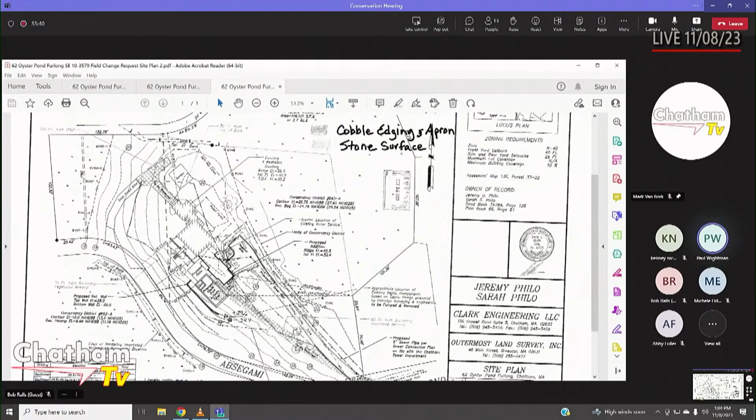Thank you, Madam Chair. First on the agenda is a field change request. The address is 62 Oyster Pond Furlong, Sarah Philo, map 13E, parcel 33-22, DEP number SE103579, addition of granite cobble apron where the driveway meets the road. That's the description, but is there also a request for laying cobblestones along the length of the driveway as part of that? Yes. That's part of it. And also part of it will be removal of the small area of asphalt that shows up on the plan. What shows on the plan as existing paved drive is being removed. Correct. Okay. Well, does anybody have any questions? There are folks here in the audience representing the project if anyone has questions about the field change request.

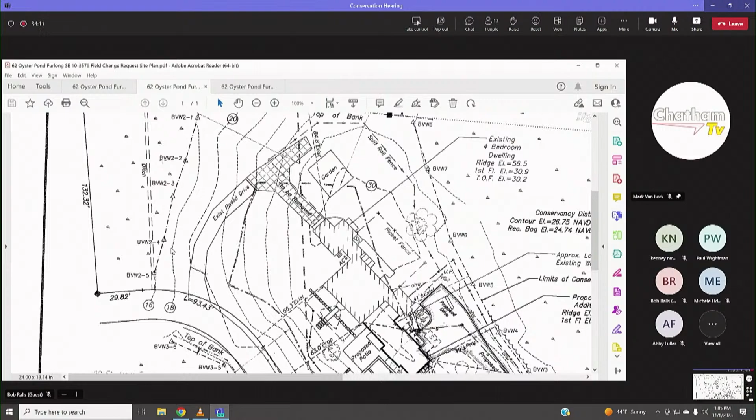Paul, do you have a recommendation about this one? I met with the proponents, and based on my review and our discussions and an examination of the plan and the materials they're going to use, the cobblestones and the removal of the driveway, I'd recommend approving this field change request. Okay, thank you. You're welcome.

I think, at least my sense is, and maybe people can chime in if they don't agree, that what we're going to lose a little bit of in permeability of the cobblestones themselves is more than offset by the removal of the asphalt driveway. So it's a net benefit, I would say. Agreed. Anybody? Any other? All right, then we're ready for a motion for this.

I move that we approve the field change request for 62 Oyster Pond Furlong. Gordon, second. Roll call vote. Bob? Aye. Elise? Aye. Karen? Aye. Mary? Aye. Cheryl? Aye. And I vote aye too, that's unanimous. Okay.

All right, Paul, moving on to the next one. Next one on the agenda, Madam Chair. Yeah, that was quick, see, in and out, you didn't even have to do anything. Yeah. Sorry, Paul.

No, it's all right. Just bear with me because, as I said, for some reason we lost the internet just before the meeting happened, so I'm working off my mobile phone here. I saw that happen, it did happen on this end, I think, so, yeah. Okay. It's back. If there's a break, I'll try to reconnect. Okay, and if not, just give us a sign and we'll read them. Okay. Well, the phone's working anyway.

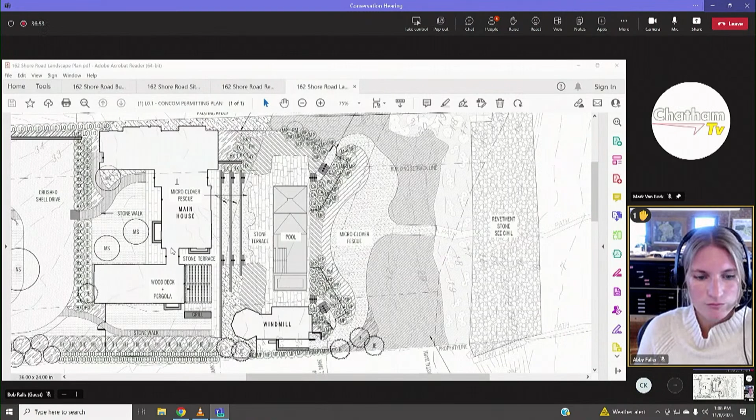Okay. Good afternoon. There is an SE number. It's SE 10-3650. Thank you, Crystal. Okay, yes. Thank you, Madam Chairman. Bill Litchfield here on behalf of Tom and Michelle Jennings, and with me is Stephanie Sequin, as you know. Also our architect, Tom McNeil, Matt Lautenberger of Wilkinson Ecological Design, and Joe Waller of Stimson.

And we appreciate Crystal's having indicated that we have the file number, and just to bring you up to date, you will recall that we had an initial hearing with you on October 11th, and then you were gracious enough to come out for a site visit on October 24th. As a result of the initial hearing and the site visit, we understood that while we thought we had a good plan, there were some things that we could do which would be responsive to some of your suggestions.

You had a concern about the retaining wall of the NDZ. You were unenthused about some of the hardscape in the NDZ. There was an issue of the percentage being above the 35% requirement. There was a fence along the north perimeter and some other fencing, which had the potential to have impact on wildlife. There was a concern that some of the non-native species might not be appropriate, some of the cultivars be replaced within your jurisdiction. Even though we had proposed a lot of mitigation, there were questions about that mitigation.

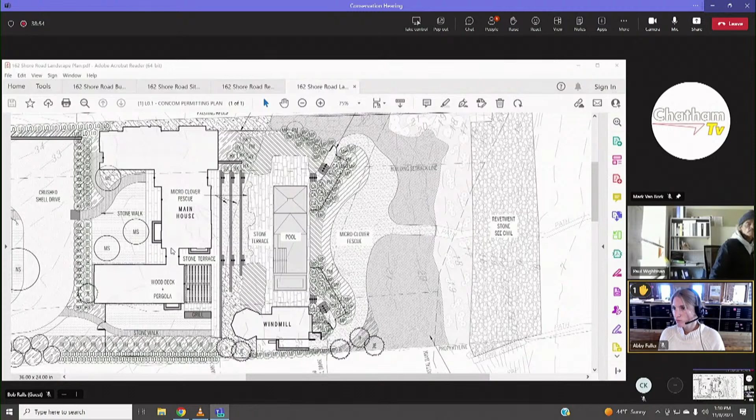There was some amount of lawn in the aura, and you questioned that, and we understood it. And when we went out there, you saw an area of pretty unfortunate invasives along the north property line. They weren't strictly on our property, but we wanted to address that as well. Tom and Michelle Jennings, the applicants, as I think some of you will recall, own the property immediately to the south, and they have been good stewards of that property, and they propose to be very good stewards of 162.

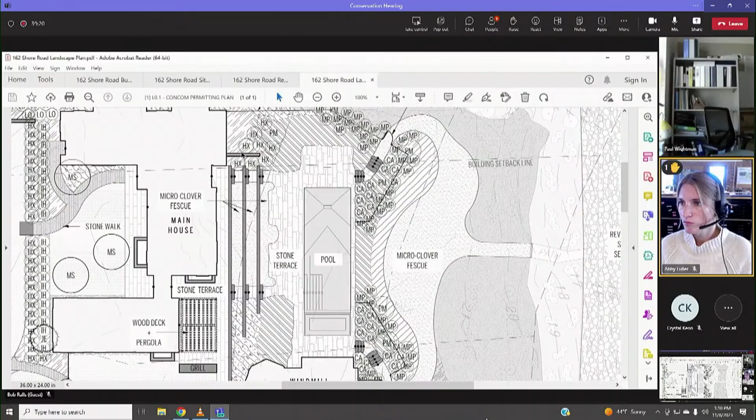The plan, I think those of you who know the history of the property went out there, you know, it had a turf lawn down to the top of the revetment. That lawn is not exactly what a landscaper would like to see right now, but it was a maintained lawn, and that's going to go away. In fact, the lawn area is being reduced in the 100-foot jurisdiction from 6,900 to 2,300 square feet, and the native vegetation is increasing by a factor of 5 from 600 square feet to 3,000.

But we understand that you wanted some additional changes, so we shifted the structures. The house, the windmill, and the rear landscaping elements have all been shifted further to the west, away from your jurisdiction. The retaining wall and the hardscape have been completely removed from the NDZ. There's none of that remaining in the 50-foot zone. We reduced the overall extent of the hardscape in the proposed plan to accomplish a 35% coverage limitation.

We are looking for some degree of grace, also known as a variance, in regard to moving the windmill completely out of the NDZ. If we left it where it is right now, our percentage in the outer aura would be lower, but we think there's a beneficial aspect for you, for the town as a whole, and certainly for the interests which you serve, as well as Tom and Michelle Jennings, by moving the windmill out of the NDZ and into the aura. We have augmented the fence gate, the fencing to provide that there will be at least a 6-inch gap below to allow for wildlife to move within that area to enable wildlife passage.

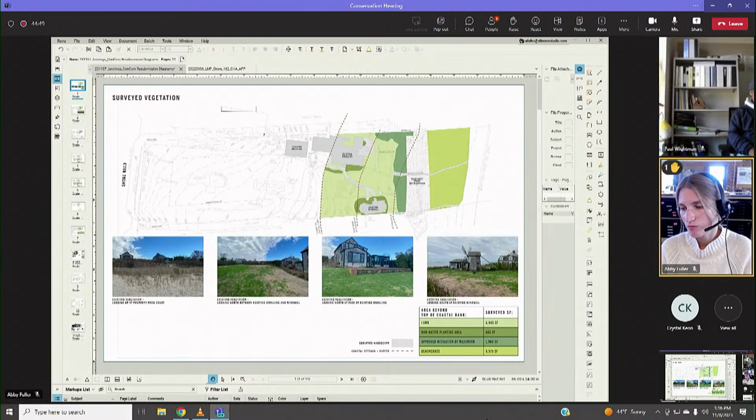If you take that number and deduct the 609 square feet associated with the windmill and the hardscaping surrounding that, that brings the coverage down to 1,995 square feet, or just about 33% of the outer aura. So we are requesting that variance to allow the coverage in excess of 35% in order to allow the relocation of the windmill out of the NDZ and into the outer aura. So that's all I really have to add. If you don't have any specific questions, I can turn it over to Joe Waller from Stimson.

Okay, before you do, I'll just note that the email that contained all of the analysis that you just gave us was sent to Paul, and then from him to Karen and I, so I have now just forwarded it to everybody else. I was about to ask you to read your email, but you have already given us the information in terms of the variance analysis and what your numbers were. So we now have that. So thank you. All right, okay.

Great. I'm Joe Waller from Stimson Landscape Architects. I have Abby Fuller virtually joining. She's sharing some diagrams which will hopefully visually document all of this information that Bill and Stephanie have just shared. Abby, could you go to presentation mode so that we see a fuller screen?

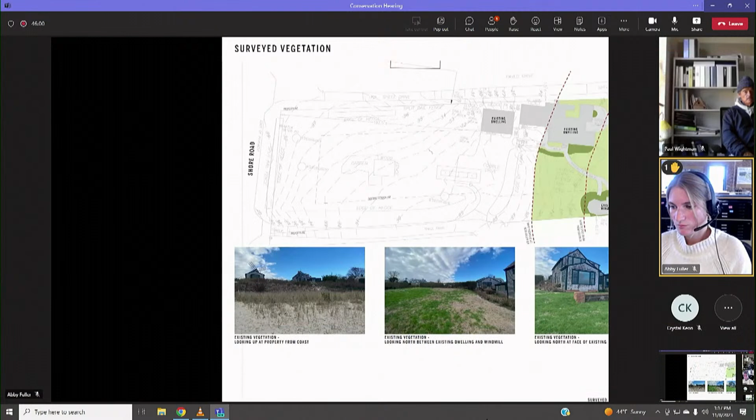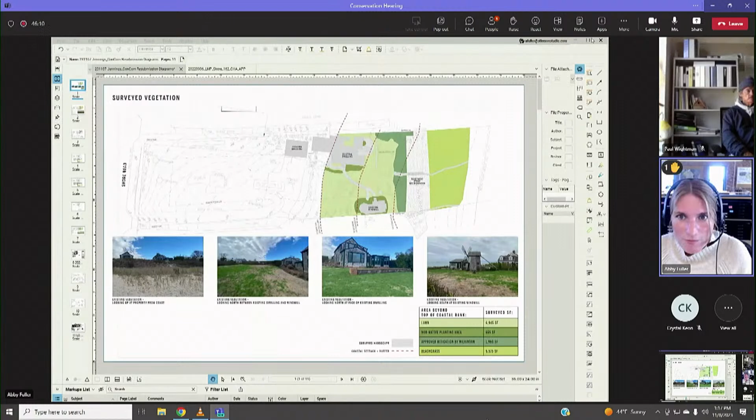Thank you. Could you just adjust, it looks like it's justified off a little bit, so you need to pull it to the left, I'm not sure. If it's not possible, we can stay on this screen. Sorry, I apologize. I think my screen is too large to do that. One moment. Oops. Is that better? Yeah, if you just go back to the first page.

Of the presentation. Great. So we all met on site. This is just a diagram of the existing conditions as surveyed and as observed during our site visit. Documentation of the metrics in the bottom right-hand corner. The site is within your jurisdiction, currently largely lawn and non-native planting. Nearly 7,000 square feet of lawn exist in the 0 to 100. Some photographs there to document it.

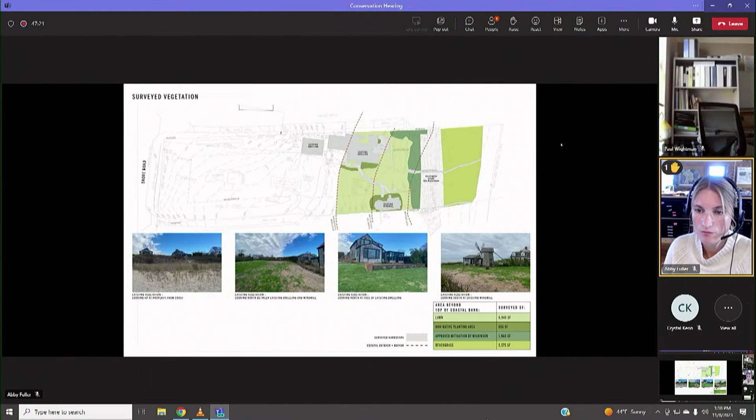There is mitigation planting, which will be happening, that has been approved as associated with the revetment work, which has been completed. And then there's existing beach grass within the resource area. We can go to the next slide. This was the plan that we previously proposed. Just wanted to quickly touch on, in this plan, we had a significant reduction in lawn and a significant increase in native vegetation. The reduction in lawn was over 4,600 square feet, and the increase in native vegetation was over 2,180 square feet. There was also additional proposed mitigation planting beyond that associated with the revetment wall that totaled 830 square feet. We can go to the next page.

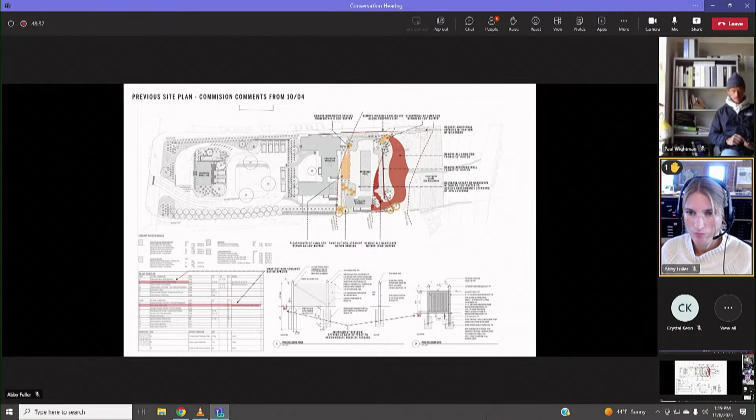As Stephanie and Bill outlined, we have documented what we heard from you in our hearing and during our site visit. The outer aura coverage, the structures within the NDZ, preference for no lawn and no irrigation, specifically the preference for native species and no nativars. So if we go to the next page, we've looked at a couple alternates to meet those requirements. This is an alternate where, and we'll show this in a diagram, where we've moved the proposed elements, the house, the pool, the terraces, back approximately 7 feet to the west to move all of the proposed new structure beyond the 0 to 50.

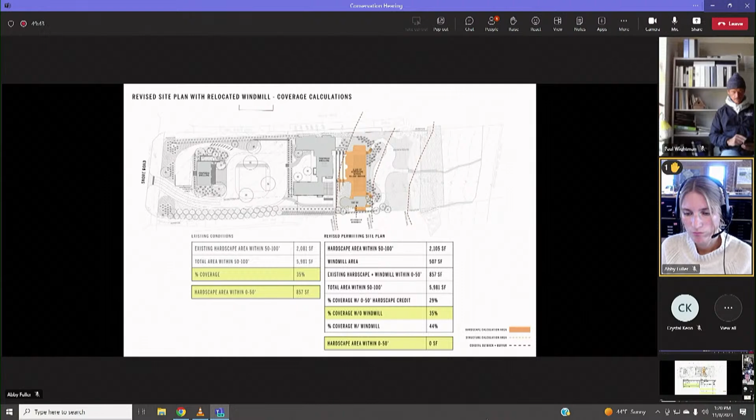This is an overlay of our previous plan and our current plan. The highlighted are our proposed plan. Might be a little hard to read for those unfamiliar with these type of diagrams, but essentially everything is shifted to the west. We've reduced the area of pavement around the pool. We've eliminated the retaining wall that was in the no disturb zone, and we've pulled all of our fences and hardscape beyond the 50-foot setback. We've reduced our coverage below the 35% if you exclude the windmill footprint. And we have reduced the amount of lawn that we're proposing within your jurisdiction. And as Bill alluded, we're also proposing to use a microclover fescue for the remaining turf within your jurisdiction.

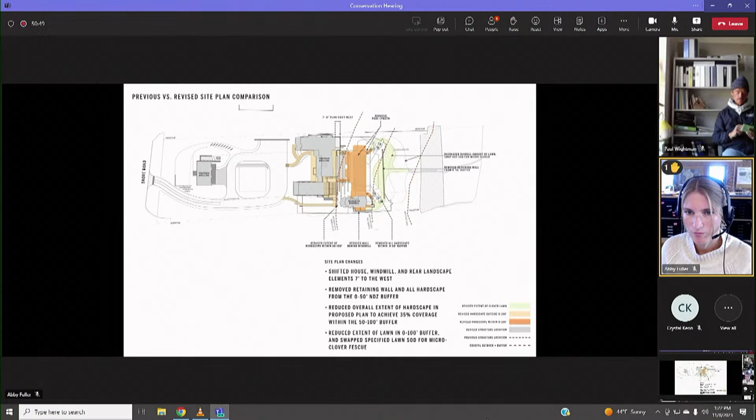Abby, I think we can go to the last slide of ours here. So this is just a plan showing you the proposed improvements in planting within your jurisdiction. We're proposing a reduction in lawn area of over 5,000 square feet with a proposed lawn area of 1,920 square feet. That would be microclover fescue. We're proposing an increase in nearly 1,800 square feet of native vegetation beyond what existed presently. And I'll turn it over to Matt to talk about his proposed mitigation planting.

Okay, thank you very much. Hi, everyone. Matt Lottenberger from Wilkinson Ecological. So this recent round of changes brought what was already a pretty strong mitigation buffer here to just being, I think, a fantastic one. You've got about a 35-foot buffer all along the top of the bank there that's going to be native grasses, shrubs. We're getting bayberry in there, serviceberry.

This is now large enough that it's going to be able to provide a significant ecological advantage or value to the site. When we were on site, there was a lot of talk about this being an opportunity to really improve the ecological function of the area, and this is absolutely meeting that criteria. This is a huge improvement ecologically to what the current state of the property is.

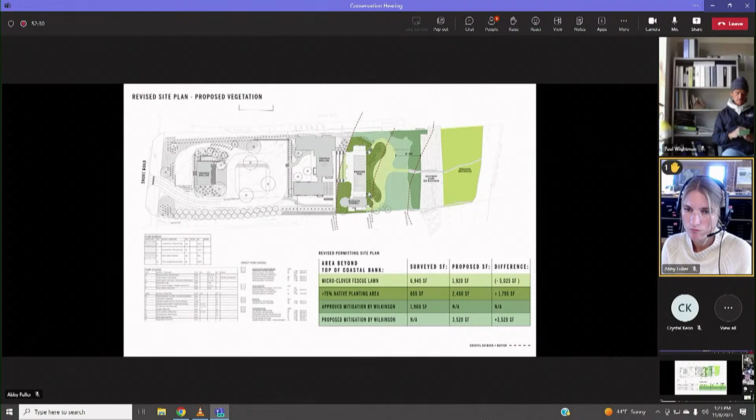So, just to reiterate, everything's been moved out of the no disturb zone. All of the plantings are now native, not just the mitigation that are in jurisdiction. And even our fences now are specified to have wildlife gaps, 6 inches or so, so that none of it's impeding wildlife moving through the area. I'd be happy to discuss any of the specifics on our plan, but just as a general overview, I think this is a great chance for Chatham.

Okay, thank you very much. If I could add just one additional point. I don't know what progress has been made by Mr. Riley in regard to license issues, but at a recent hearing, you discussed that, and we have already spoken to our neighbor to the north. He's entirely willing to cooperate, so when you come up with a form or a document, we can take that for the area that's not on our property.

Did we say we would come up with a form of a license agreement? My recollection is that there had been discussions on another matter. I think Mr. Riley volunteered to do that. I think it was being worked on, and we thought that we would use the same format once the document comes up. Yeah, that all makes sense. They're both very similar. Thank you. Okay, just making sure that the ball's not in our court and we're not knowing it's there. Okay. Thank you all.

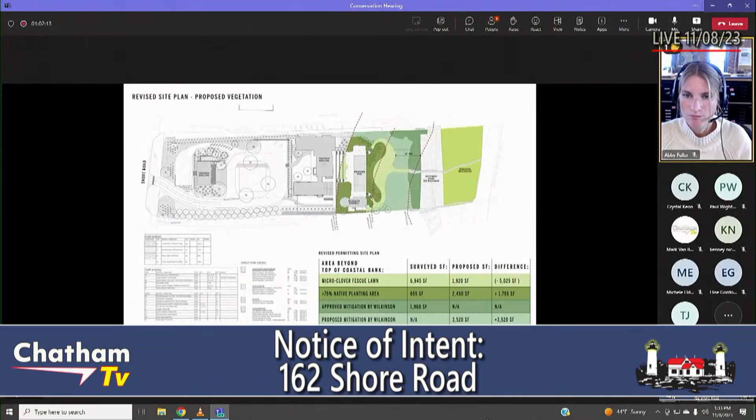And that is also proposed to be a micro clover lawn in those pieces. And you can see on this diagram here that about half of that falls within the 0 to 100, and the other half falls outside of jurisdiction. Right. So, I know you've asked for a variance and everything, but those could be shortened and that would decrease a small amount. It won't be huge, but that's another way to decrease. Just a thought. That's all I have. Okay, thank you, Karen. Mary?

Thank you for listening to our concerns, and I do think that this plan definitely addressed what I was looking for, which is to move it out of the 0 to 50. It's probably in one of these 100 plans that you sent, but does the pool have an automatic cover? It is currently being contemplated whether there will be an automatic cover on the pool. Okay. Well, I didn't know if that changed the need for fencing. Yeah, the building code does allow for the pool enclosure to meet the barrier requirements, but that hasn't fully been decided yet. Okay. But no, I don't have any other questions. All right, thank you. Cheryl?

I'm sorry, I missed the site visit. It was very interesting. It was. But it is a big difference, and so I appreciate that you were flexible and worked with the things we were looking for. But I have no other things that have not already been covered. Thank you. Okay, anybody else? Anybody on the platform or on the phone or in the audience here have any questions or comments? Seeing none, okay.

The existing dwelling constitutes 995 square feet, and the new dwelling is going to be 1,431. So by all standards, what Carolyn and her architect are proposing, we believe is still a very modest dwelling. We're maintaining the existing number of bedrooms. We're just providing a little bit more living space via expansion of the second floor and an expansion toward the north of the property.

We also have to go before the Board of Health for variances because we literally can't fit a septic system on the site over 100 feet away from the resource area, as is required by their regulations. So we're going to be filing several variance requests with them. We're holding the septic system as tight to the north property line as possible. The architect has made changes to the building so that where the expansion is occurring near the septic system is on a slab, which allows us to go closer to the building than we would if we had a full foundation.

The state is going to adopt the Mass Stretch Energy Code soon, and that essentially will result in houses like this to be totally rebuilt. The purpose for that is to become more energy efficient, using less carbon, and the regulations are such that it just precludes trying to reuse this building, and I noted that in the alternatives analysis.

I'm going to jump right to Goal 4 on our goals and objectives page and talk about the need to improve access and circulation. So our plan is presenting, we've proposed some terraced walls to provide safe access and circulation from the lower parking area at the garage up to the landing that leads to the deck and the front door. We've looked at a lot of opportunities here for terracing.

Ms. MacDonald's goal is to really minimize the amount of hardscape on this site, including structure and terraced walls. So we've reduced those walls to the extent possible to allow stepped up steps from that lower parking area to the landing and to the deck at the main entrance.

In addition to that, as far as hardscape, we are proposing a permeable walkway from the northern parking area, which is over the existing septic, to allow safe access to the door that leads to the master bedroom area. And we are proposing a permeable patio to the west of the structure to provide some outdoor living space, room for a rinse station, and for things like recycling and trash access, and room for a patio table and a grill. We've designed all of this with the intention of maintaining as much of the existing vegetation as possible.

There's a large cluster of existing rhododendron on the northwest corner of the property, which provides significant screening between this property and the property just to the north. So we worked diligently in order to protect that existing rhododendron stand, so that we do not have to remove that in order to get the wall and the patio as well as the septic system in.

So the grading on this project has really been keeping in mind minimizing the amount of hardscape, maintaining a slope that, while it is still steeply sloping, can be vegetated to help slow water down and infiltrate water. All of the vegetation that's proposed within the foundation planting is native, 100% native within the 50-foot as well as within the 100-foot buffer zone, with the exception of the existing rhododendron that's on the site that will remain.

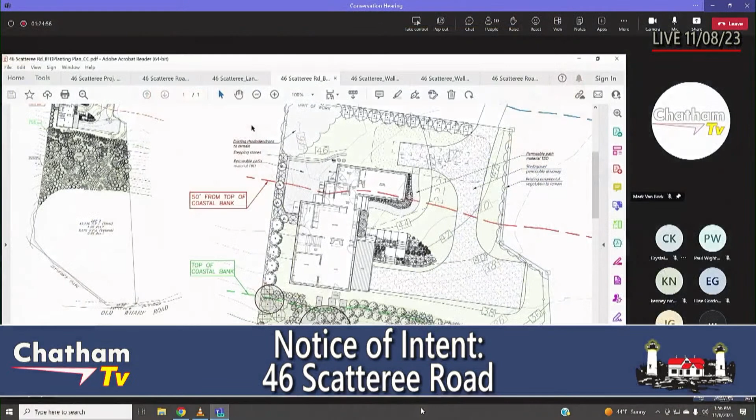The site itself, as you can see from that picture, is Cape Cod lawn. The one rhododendron in the northwest corner, Carolyn was adamant about keeping that. We've tried to keep that one spot that provides not only her, but her neighbor and another neighbor with a little bit of a buffer. So we didn't just put this on a piece of paper and bring it in. We do appreciate that, we do.

Who's controlling the sharing? Could we see the site plan, please? Oh, it's us. Oops.

Since you were talking about it, when is the sewer actually expected to come to this area? I have no idea. Dave Clark, do you know by any chance when sewer might be coming down Scatteree? No. Not in our lifetime. Yeah. 25 years.

You can't walk away from, you can't do that. Forgive me. There's a laser pointer somewhere, a laser device.

We have property line setbacks, we have setbacks to the building. We're asking for variances to both and siting it as northerly as possible, and also trying to save that one rhododendron in the northwest corner. So, right.

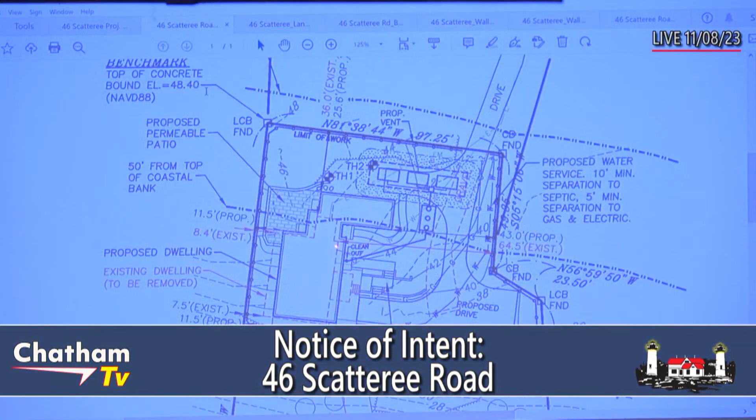Right. Janet, I do have one thing I'd like to add to your comment. There used to be, off this end of the existing building, which is in red, a large handicap ramp. I saw pictures of that. I could have included it in the coverage calculations to bring the numbers down. We removed it when we did the test holes, and we didn't put it back for obvious reasons. So I could skew these numbers. That's okay. Well, I just wanted to point that out. No, I appreciate that, you could have left it there and that would have changed the numbers.

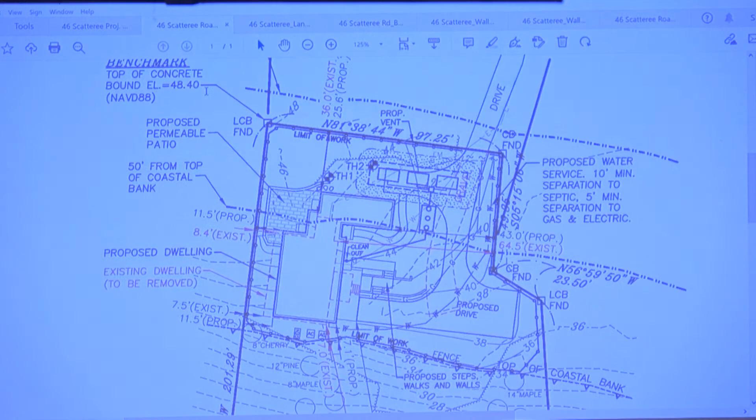My only question here was, since putting a gravel driveway over the leach field is okay, why couldn't the leach field have been turned to run north-south underneath the driveway, freeing up that area where the house could be pushed back? It's a balancing act with the health department. I think probably the most difficult variance is siting a leaching facility within 100 feet of a resource area. It's much easier to grant a variance from a setback to a property line or to a slab, but when you're looking at water quality and protecting the resources, that's why we sited it that way. So that's the furthest you can put it away from the resource area, and if you turned it, that part of it would be closer.

Yes. Okay. I can tell you, there were conversations about changing the orientation, and David said it wasn't possible to do with the Board of Health regs. It doesn't show on our plan, but the existing cesspool is right near the top of the coastal bank. So it is a significant environmental benefit. Oh, I agree, that's terrible. Is that where there's a stone marker that says cesspool? Yes.

Okay, I'm having an attack, so I'm gonna turn it to Karen to ask questions while I sneeze.

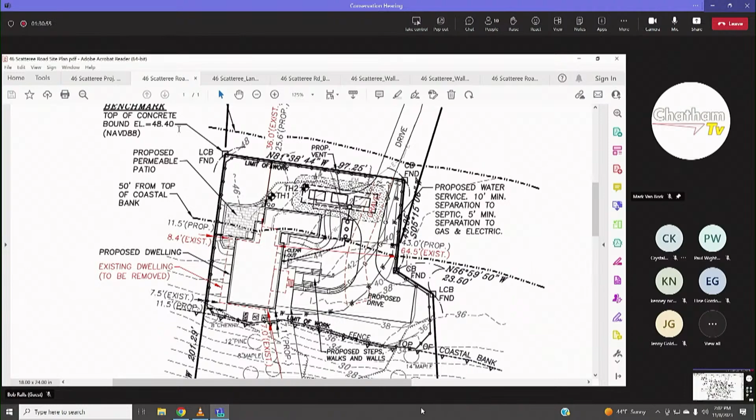Could we look into, what were you saying, Teresa? I was just thinking, because it's over the leach field, the only thing we can put there vegetation-wise would be grass, so we wouldn't be able to put any significant vegetation in that area. We could potentially look at grass pave, using a grid system underneath and planting the grass into it. We just can't plant anything that could potentially grow roots into the leach field. Oh, no, I know that.

Given your concern, Karen, perhaps we could look at more of a drive that has grass pavers in the vehicle tracks. Oh, yeah. And it would be the fescue that Teresa's proposing. Right. I think we could look into that. Yeah, I think we could probably improve on the numbers.

I would appreciate it, because it is quite a bit of driveway. I know you're very constricted; this is a very tough piece of property, and I appreciate what you've done, but there's a lot of driveway in this. Understood. We can look at that. Okay, thank you. That's my concern.

Okay, thank you. So let me just clarify, are we talking about the length of the driveway? I'm gonna look at the entire drive and see what we might be able to accomplish. Fair enough, thank you. I think that would alleviate a lot of the concerns that we have up here. Mary, any questions?

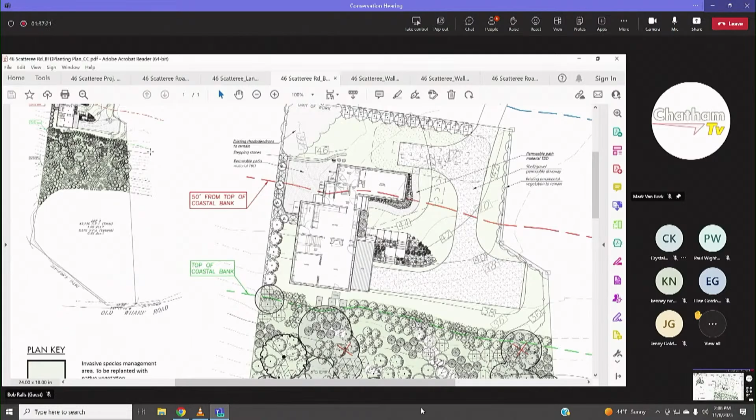After hearing everybody, I have some thoughts on the driveway that I'd like to work on and share. All right. Very good. I think that's all I had. Okay. Elise? What are the steps made of? We're imagining the steps will be granite. Okay. Otherwise, everybody's covered any questions I had.

Okay, let me just check and see. Do we want to see if that person's hand is up? Yeah, we're seeing a signal of a raised hand on the Teams platform. Is there somebody who has a question or a comment? Yes, hi, this is Jay Savely. I'm the abutter, the owner of the property to the north of the site. I'm sorry, can you say your name one more time? Yes, it's Jay Savely.

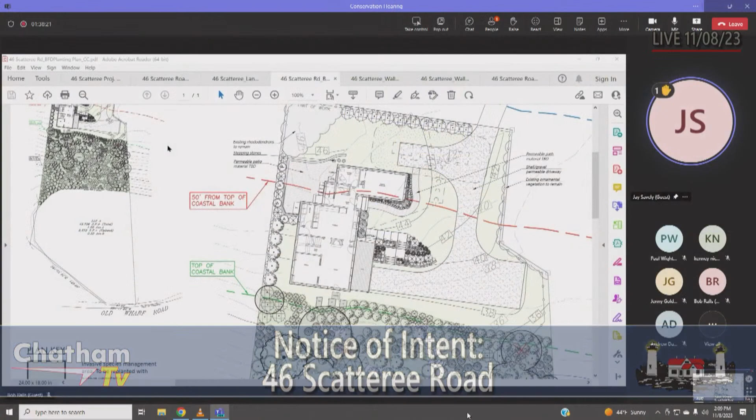My question is, I heard two things. One is, there was a comment at the beginning that the footprint of the house is staying basically the same, but it looks to me from the drawings, the existing structure in red and the dotted red line, which is the 50 feet from the coastal bank, everything north of that is an expansion on the north side of the property. Correct. I don't know how you say it's the same footprint, because that large extension on the north is all new. That's correct. I believe what he was referring to was the footprint within the no disturb zone, and the expansion that's proposed, 345 square feet, is outside of the no disturb zone, in the outer area. But it's still within 100 feet from the coastal bank? Would be about 60 feet at that point, yep.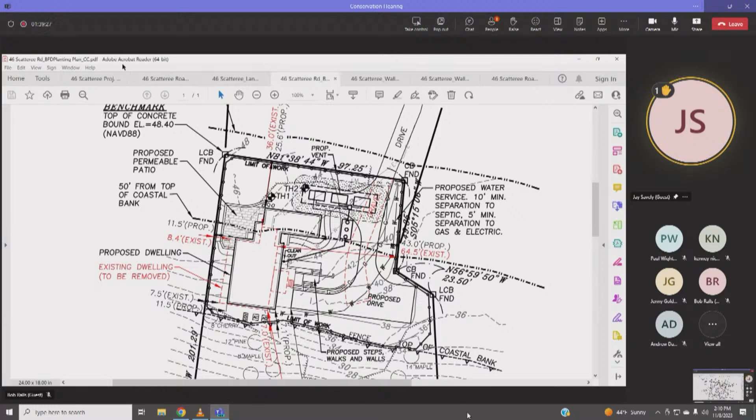Okay. And the other question is about the proposed parking. It is a lot larger than what's there now, because for the most part now it's grass and mud. Is the reason for the increase in parking because this is most likely going to be a rental property? That's really a zoning board question, if at all. We don't generally inquire into what people plan to do with properties. It's not relevant to what we are doing. We've made the point that we thought the parking may be excessive, and they're going to look at how to make it more ecologically friendly and less intrusive. So I don't think the owner's plans for how they're going to use the property are really relevant to this consideration. Okay. All right, thanks.

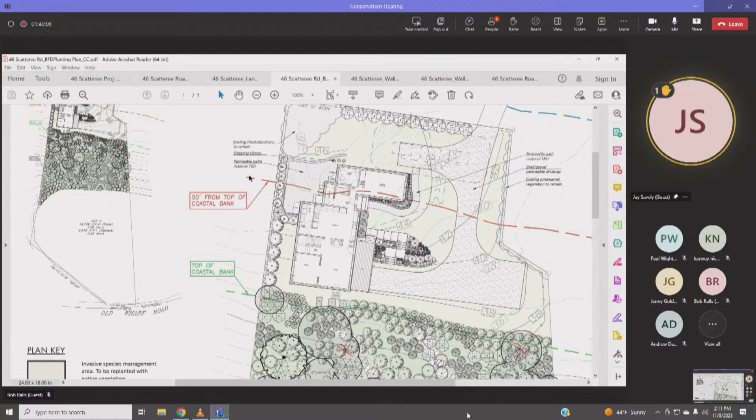Okay. Any other questions or observations? Sir? No, not for this. Okay, thank you.

I just wanted to point out, which may be helpful for the abutter to the north, that we are proposing to maintain screening. There's a lot of invasive vegetation currently along the northern property line. We are proposing to remove that invasive vegetation and plant native vegetation, but we're being very considerate of views and not wanting to obstruct views for the property owner to the north. The existing stand of rhododendron will remain. We'll just be doing some regenerative and health pruning to the rhododendron, providing screening along the northern property line in such a way that it is not going to obstruct any views for the neighbor to the north.

And what are those plantings along the line, if you want to put his mind at ease? Let me pull up the plan. Yep, so the plantings to the north are arrowwood viburnum, a shrub. Okay. Yeah, it's nice to hear. But Carolyn, as you know, you've said to me in the past that you don't care about my view and you'll block it if you have to. So it'd be nice to see something like that in writing, that you don't plan to block it.

Well, it's on the plan of record, in writing. It's on the plan of record, so, yeah. We still have two more hurdles, the Health Department and the Zoning Board of Appeals, which might be a better venue for this. Yeah, when you get to views and concerns of abutting neighbors, the Zoning Board of Appeals is the place to weigh those and listen to those issues. They are very sensitive to them.

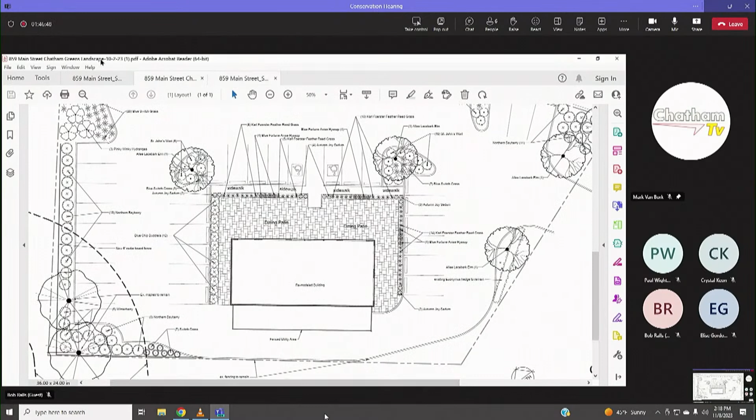So with the redevelopment, the landscape architect, the architect and Clark Engineering worked on overall site improvements, given that it's almost a blank slate as far as the exterior of the building is concerned. So we looked at the available room between the building and the westerly property line and the maneuvering requirements for a double-loaded parking alley. And so there was an opportunity to move it away from the westerly property line and up a little bit from the southerly property line.

The other thing we looked at was trying to streamline the drainage. We're kind of stuck with where the building's first floor is, so there wasn't a lot of leeway on how to grade this, but what we did was fill that southwest corner and pitch the whole parking lot out towards Route 28. We showed two trench drains at the two entrances off of 28, and everything, with the exception of a small portion behind the building, will be pitched to those trench drains.

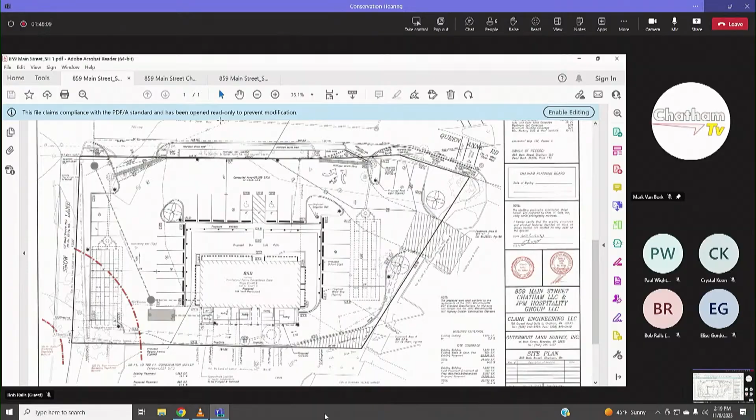From there, it'll be piped back through a couple of manholes to a new, vastly expanded infiltration structure that'll be underneath the pavement. Because it's a commercial project, we submitted a stormwater report in accordance with the Massachusetts stormwater policy. Same report that's been filed with the planning board.

Existing parking lot is asphalt paving. The new parking lot will be asphalt paving. The areas between the parking curb and the westerly property line, all that pavement will be removed. We submitted a landscape plan showing how that area will be revegetated once all the asphalt's gone.

Within your jurisdiction, I think for a lot of the property, the plants that are called out for are straight natives, especially in this corner. We're going to the planning board for the first time this coming Monday. Other permits that are required is the Massachusetts DOT access permit. Right now, I think we're in the 75% design stage on that.

And these plans have been resubmitted to Mass DOT. We haven't gotten any feedback. But for the most part, DOT's review is the entrances. I think that's it. Just planning board.

Obviously with the reduction in pavement, the coverage is being reduced. We can't get to the 35% of your new regulation, but we're already way over that with what's there now. We've made the most improvements we can while keeping the number of parking spaces where planning board likes to see it for the proposed use. Okay, thank you very much.

So it is clear when you stand there that it's an inverted bowl at the moment. So the plan is to remove all of the asphalt in the back and then raise that up so that you're directing all of the stormwater to the two trenches in the front? Yes. I looked at all the calculations. We don't get very many opportunities to look at this stuff because everything we do is mostly residential. So it was interesting to go through it, but to make sure that this has all been sized appropriately, since you're putting all of it now into those drains for infiltration.

Yep, and those trench drains are not what you typically see for either a residential driveway or a patio. They are 14 inches wide, I think 19 inches deep, so they're almost the size of what the state would call a gutter inlet, and I think they're 20-something feet long, so they have been sized to capture the entire parking lot. Okay, so it was the 25-year storm. Actually, the infiltration is almost enough to infiltrate a 100-year storm.

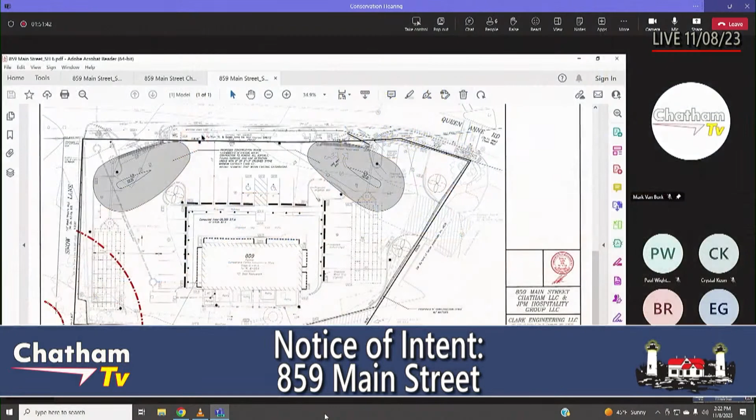And you have two retention areas. How does that work in an asphalt? Well, we're gonna take up all the asphalt. The whole site? The whole site, we're gonna start fresh, because it's broken up so much from even before Cumberland Farms owned it. When they came in, I believe they put in all new pumps, so there's patches all over the place, plus the remediation when the tanks came out. There's not much left of the original pavement, so it's better to take it all up, remove it from the site, regrade it, put down a fresh, substantial, modern base, and then pave on top of that.

Okay. So these two gray circles are temporary during the construction? Yeah. And then they'll be replaced by the trenches that are gonna go in? Yes. So just to make sure, when the tanks were removed, I'm assuming that everything was remediated and the soil was tested so that when these infiltration systems go in, there won't be any possibility of the groundwater, as it moves back down toward the wetland and toward Oyster Pond, picking up anything?

No, part of the site closure when the tanks came out is a full certificate. DEP's involved, the licensed site professional that was responsible for the removal of the tanks files reports with DEP. I figured that, but just didn't see it, so I just wanted to make sure that that was all in place. Okay, let's start over here.

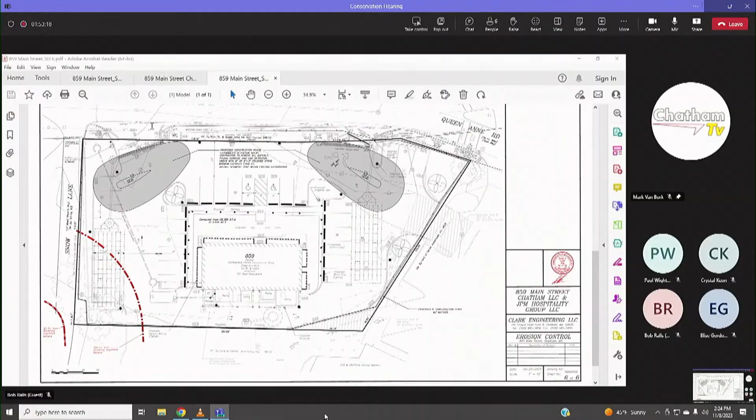Elise, do you have any questions or comments on this? It'll just be fun to not look at that ugly building anymore when this is done. I think the trenching is fascinating. I'm with Janet on being able to look at a commercial site. I think the plantings and the plant choices look okay to me. Clearly, it's a different challenge for us to look at.

There's no trees coming down, and it's a pretty straightforward program and planting. I just hope that the restaurant's successful. I didn't see anything to object to from my perspective. Okay, thank you. Bob? Yeah, I'm not going to say anything negative just because I don't want to jinx a new restaurant in town, but

there is a gigantic tree on the left side. Is that outside of our jurisdiction? I think there are 2 willow trees in that southwest corner. Is that what they are? And I think he's calling them out to remain. Oh, it says 2 maples to remain. Oh, okay. When I was out there a couple of weeks ago doing perc tests, there were no leaves on them, and they looked like willows to me.

I'm not sure about that because the plantings on the left side over there don't show a humongous tree. There's 2 big circles. No, I'm not talking about those. I'm talking about one, it's sort of halfway up that property line, maybe a third of the way up. And it's right in the middle of the fence. I have a picture of it.

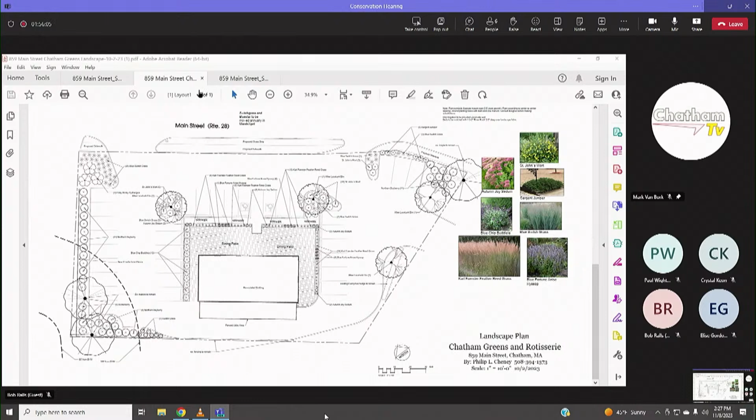That one, yeah, that's shown on the plan to remain. Well, that's one of the 2 maples. Okay, got it, all right. Yeah, it's a multi-trunk. It just didn't seem to line up to me where it was shown on the map, but that's fine. Okay, thanks. Anything else? That's it. Karen? I don't have anything to add. Mary? No, I don't have anything to add. Cheryl? Okay, we're good.

We will schedule this then to meet again to review an order, December 6th. Seems to be the date we're going with today. I move that we continue 859 Main Street to the meeting on December 6th for an order of conditions. Gordon, second. Roll call vote. Bob? Aye. Elise? Aye. Karen? Aye. Mary? Aye. Cheryl? Aye. And I say aye, so that's unanimous. We'll see you back here on December 6th. Thank you.

All right, Paul, where do we go next? We're now moving on to the certificates of compliance. First on the agenda is 31 Thayer Lane, applicant William and Amanda Madar, trustees, map 16G, parcel K4, SE10 954. It's an old one. The project was permitting an existing pier under the Massachusetts Chapter 91 amnesty program. The pier was destroyed in a subsequent storm and was never rebuilt. The owners have no plan to rebuild the pier.